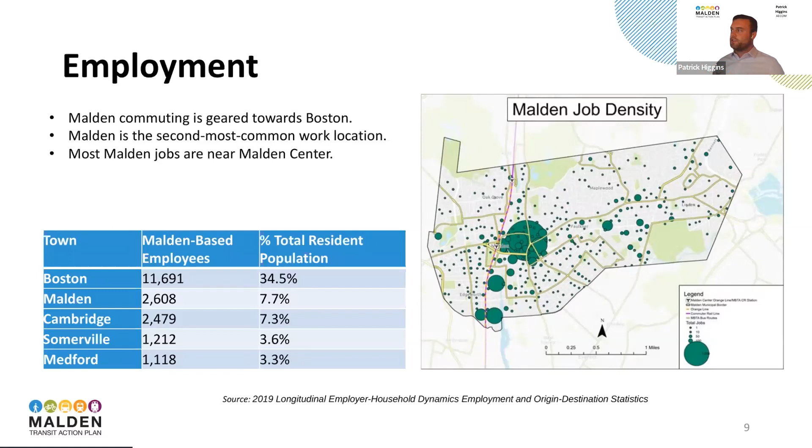Yes, so we do have a public survey open. The link will be shared later on. It's also on the city's website and on SurveyMonkey. Hopefully you've seen postcards and flyers around town and social media blasts about it as well.

To date, as of about 10:30 this morning, we have 961 responses, almost to 1,000, which is really exciting. The survey is available in 7 different languages, and we can also track how many folks in each language are responding.

We have the highest percentages of non-English folks responding to the simplified Chinese survey, as well as the Spanish survey—those are the higher percentages. That does match some of the distribution of languages spoken within the city, but we will continue reaching out to different communities and limited English proficiency communities to make sure we're hearing from as many folks as possible.

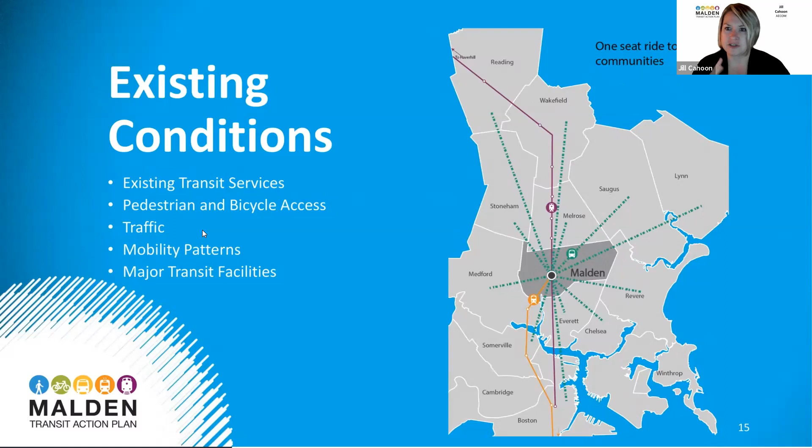With that said, we'll jump right into existing conditions. We don't have a poll right here, but we will have more. What we wanted to do is talk through the different modes of transportation - bus, train, in which case for train we're lumping Orange Line and commuter rail together, and then also lumping together pedestrian and bike access. However, we will talk about those separately as well since pedestrian and bike access is quite different.

And this is for weekdays. Of course, the frequency of the buses is also less frequent on the weekends and Sundays in particular, as folks who live in Malden and use the bus know well, and throughout the MBTA service area as well.

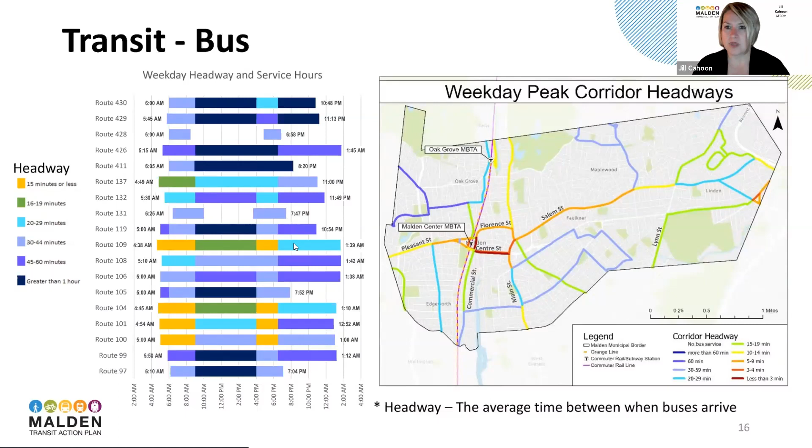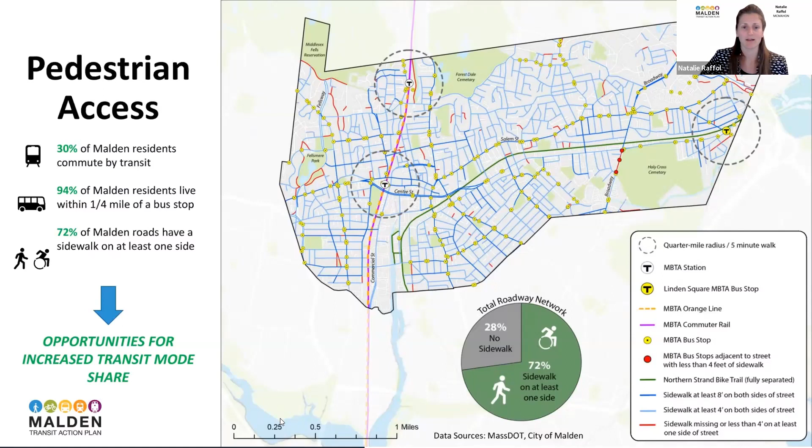We can see the majority of the roadways in Malden have sidewalks, and they have sidewalks that are over 4 feet, shown in blue. The light blue shows sidewalks that are at least 4 feet on both sides, and the darker blue, along Center Street and a portion of Broadway on the top right, have sidewalks even over 8 feet wide. That gives us even more opportunity to consider things like transit amenities that might fit on the sidewalk to help incentivize the use of transit.

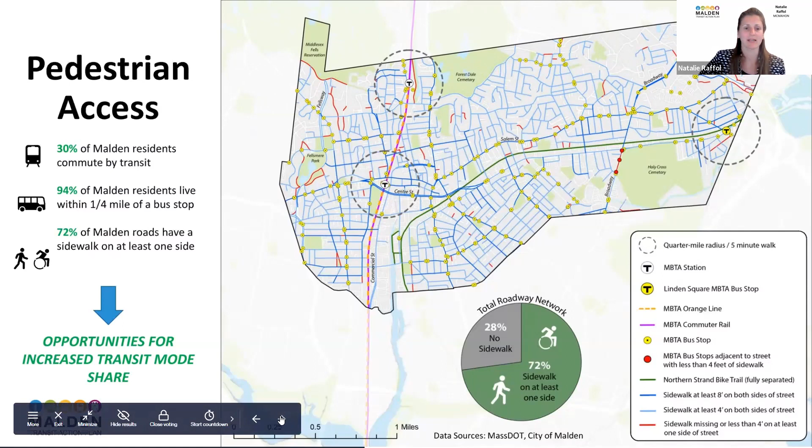If we go to the next slide, we looked at the 3 transit hubs in Malden in more detail in terms of the sidewalks surrounding them. Within a fourth of a mile of Malden Center Station, 93%, almost all of the roads have sidewalks on at least one side of the street, and 69% of those could be considered accessible with a width of at least 4 feet.

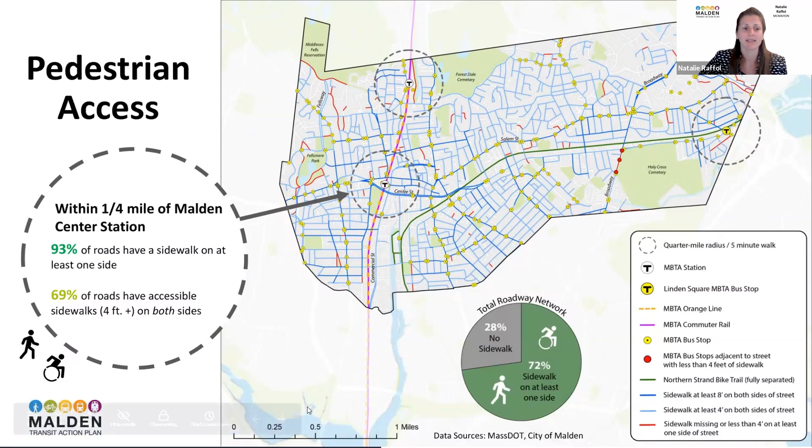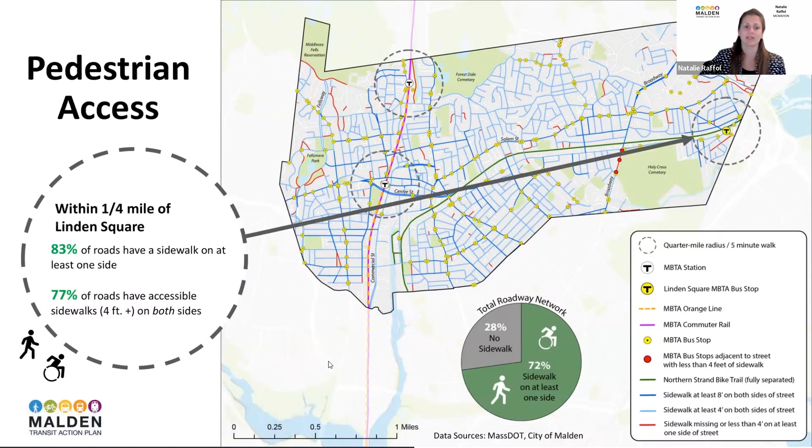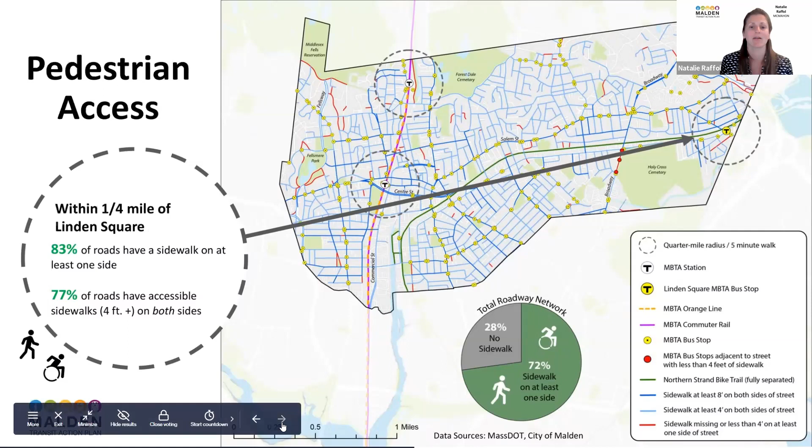Around Oak Grove, slightly lower percentage, but still vast majority of roadways have sidewalk on at least one side, and 64% of those are at least 4 feet wide. Lastly, in Linden Square, 83% of roads have sidewalk on at least one side, 77% of which are accessible. So overall, pedestrian access to transit in Malden is not so much about whether or not a sidewalk exists, but what the condition of the sidewalk is in terms of width and other factors.

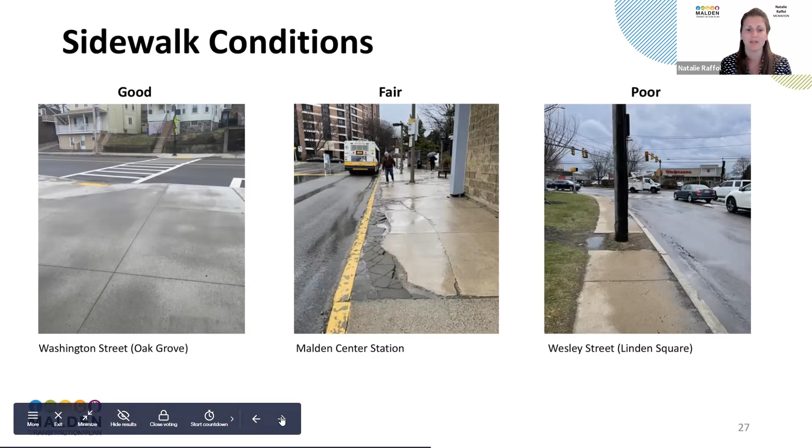Next I'm going to talk about bike access, which was also brought up in the last question about needing bicycle facilities to help facilitate access to transit. As expected, there's less current infrastructure for bikes than for pedestrians in the city. Providing bike lanes is relatively newer, but overall we see there are 10 miles of existing bike facilities in the citywide network, comprising 6% of the roadways.

That's providing direct access to Linden Square bus stops, and also has some connectivity to Malden Center. But overall, there is room to improve connectivity for bicycling throughout the city to different neighborhoods, especially north-south connections, and looking up towards Oak Grove to expand connectivity there.

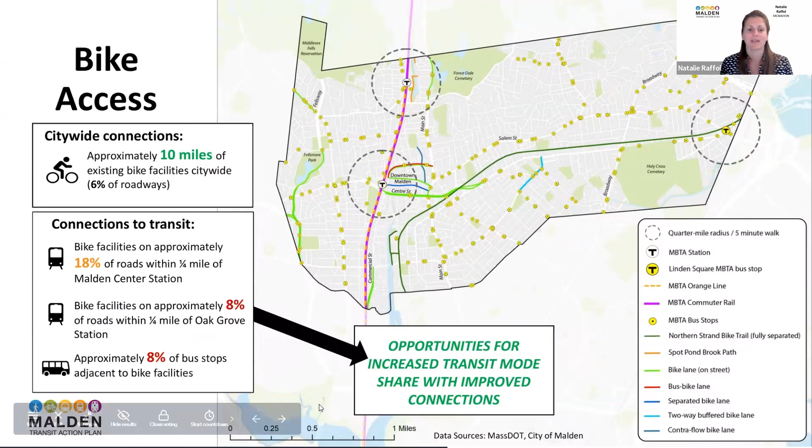So we go to the next slide. This shows a sampling of the different types of facilities in the city. There really is a wide range of on-street facilities. At the top left, we can see sharrow markings, which is where bikes share the road with vehicles.

In the center of the top row, there's the marked on-street bike lane on Center Street, and then the bus bike lane on Florence Street, so buses and bikes are sharing that lane. On the bottom row, on Exchange Street, we see a separated bike lane that has parking as the separation between the bike lane and traffic. Then a two-way buffer bike lane on Willow Street, and a contraflow bike lane on Dartmouth Street, which allows bikes to travel in the opposite direction of general traffic, helping provide a more direct connection for bicyclists.

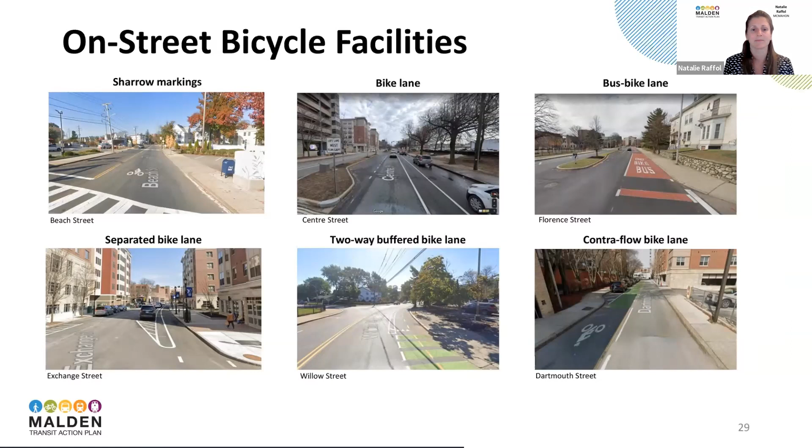If we go to the next slide, you can see there's a variety of facilities. And so we need to think about what people these facilities are catering to, because a facility might provide a connection, but it might not provide a connection for all types of people.

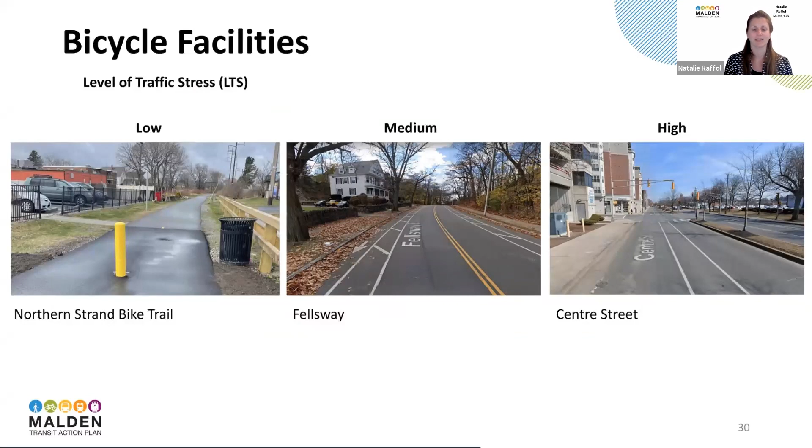So in order to try to evaluate that, we look at a metric called the level of traffic stress. That evaluates different types of bicycle facilities based on how close they are to vehicular traffic, whether there's separation, whether there is on-street parking on a roadway, or the traffic speed. Essentially, how much conflict or stress a bicyclist might be experiencing.

If you go to the next slide, you see here depictions of different types of people or users that might be expected on these facilities. A low stress facility would be the Northern Strand Bike Trail, which is completely separated from traffic, so a low conflict area, suitable for all ages and abilities. Something like that would be thought to provide the most access to transit, because you're providing a facility for the most amount of users.

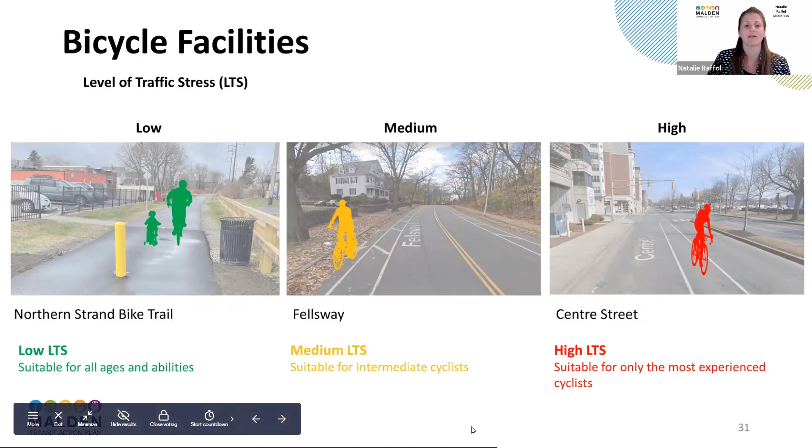Then a medium level of stress would be something like a buffered bike lane, where there is some distance from the adjacent traffic, but you're still riding on street—that's more for intermediate cyclists. Then a high level of traffic stress would be a bike lane on the road without any buffer or separation, and only the most experienced cyclists might feel comfortable there. So, for example, if that provides a connection to Malden Center, let's say, it's providing a connection for some bikers, but potentially not all bikers, to access that station.

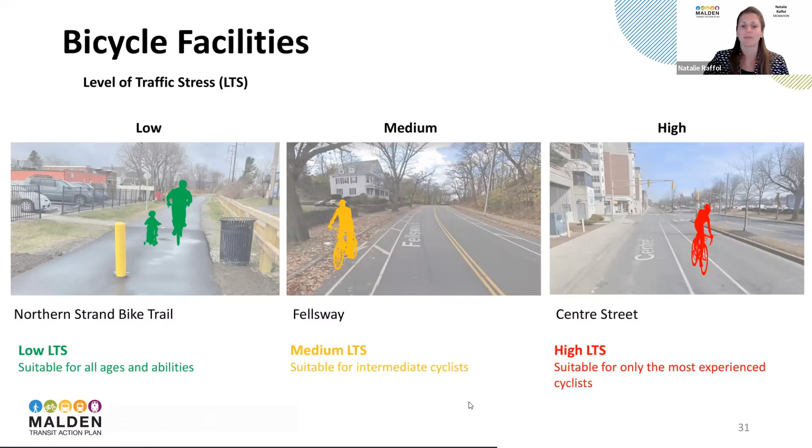So if we go to the next slide, the final topic I'm going to discuss as part of this is bike parking, because part of accessing transit by bike is having the ability to park your bike somewhere. Some people might choose to take a bike on a bus with them, but if not, then there needs to be safe and secure bike parking, especially for people who might be commuting and leaving their bike unattended for long periods of the day. So we did an evaluation of the bike parking available at the three transit hubs in Malden.

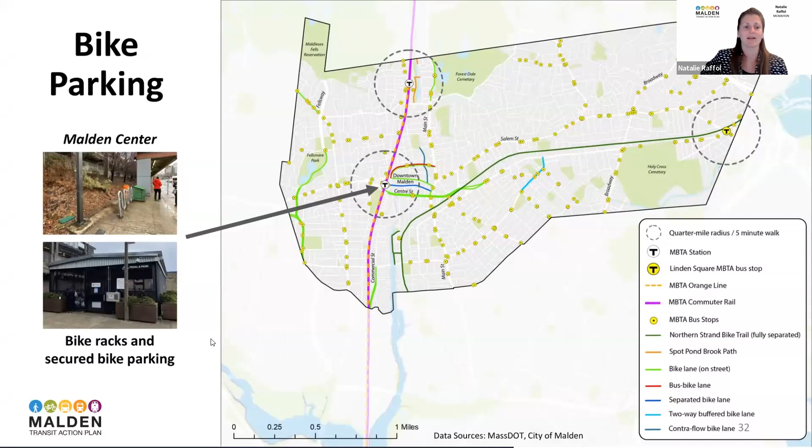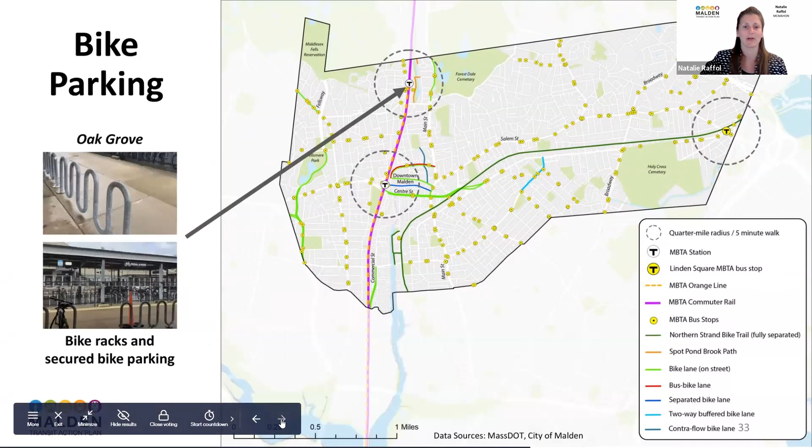At Malden Center, we see a variety of parking where there's the typical bike racks in the front, which are very visible and easy to use, but might not be suitable for people leaving their bikes for the whole day, who might want something more secure. So at the back of the station, there are the pedal and park bike racks, which provide that security. Similarly at Oak Grove, there's the more typical visible bike racks, as well as the secure pedal park facility. And last, at Linden Square, there's actually only a small bike rack on the sidewalk.

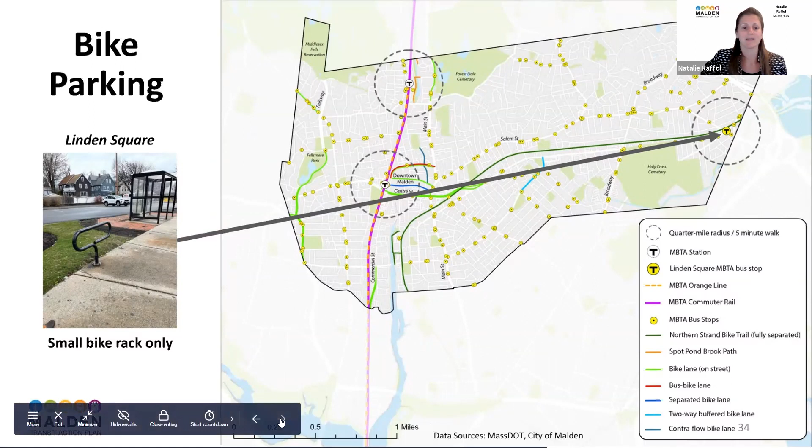So that's an area to think about, potential to expand bike parking to help incentivize using the bus service there, as the Northern Strand Trail is running right by the bus stops. So having more bike parking might help people use the bus more easily. That's the information I'll conclude this section with, and then I think we'll go to another polling question.

Excellent, thank you for that, Natalie. As you can see, there's a lot of things to consider when it comes to bikes and pedestrians, and where the facilities are and the classifications, as Natalie went through. So it'd be interesting for the community to reflect upon what's working and where you might need some improvement throughout the city as well. Again, a reminder to join online, the website is at the top of the screen here, www.menti.com, and remember to use the code as well.

So our next question here is, where do you experience the biggest barrier to accessing transit? Where are the biggest barriers for you to be able to access really the accessibility of getting into the transit facilities?

And what's interesting about this is the one where you can place some dots on the map here. So as you're seeing some of these dots show up, if you can zoom in a little bit and try to get as close as you can, it'd be great to understand where some of these accessibility issues are for transit. This would be really helpful for the team in understanding where some of those barriers are, and maybe they turn those into some actions that we can improve accessibility around these different stations, whether it be about bike, pedestrians, walkability and so forth. This is really kind of helpful.

So let's intentionally let this sit for another 20 to 30 seconds here to fill this up. And if you don't have the chance to put your dot on the screen, it'd be great to talk about that during the Q&A, because understanding where some of the highest issues are, and really where some of the successes could be coming out of this plan, would really be helpful in terms of giving us some really clear action. So this is super helpful as well.

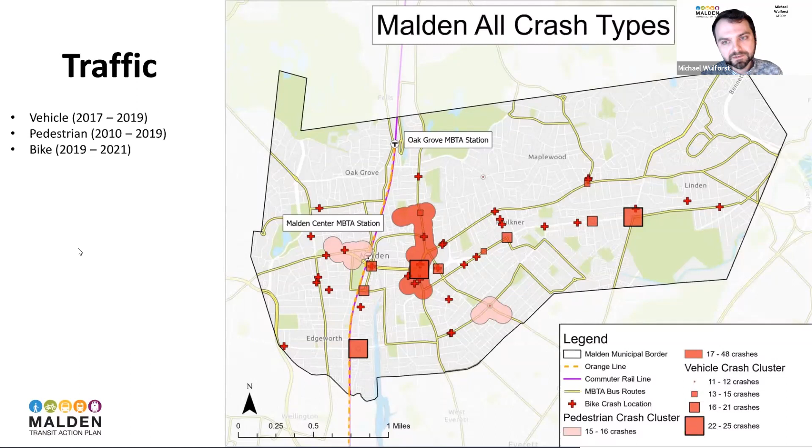So in addition to safety, we also want to look at the traffic volumes using the roads. Currently, a large portion of the roadways are dedicated to serving vehicular traffic, and so naturally we want to understand where those vehicle volumes are greatest.

So going forward, when we're thinking about how to potentially better serve bus routes and bus priority, this data will be really informative to help us craft bus priority opportunities to bring to you all for further consideration.

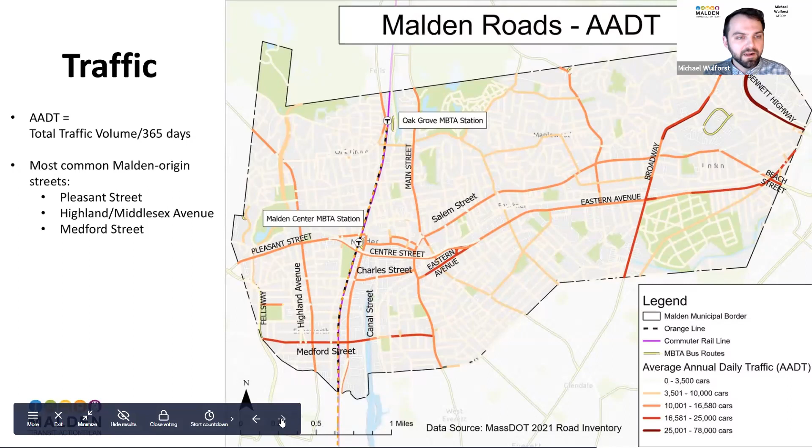And so with that, and looking at this traffic volume, I'd like to hand it over to Patrick to talk a little bit about travel trends in the area.

Thanks, Mike. So I think the AADT slide we just saw is a nice transition into this. We understand the corridors where this traffic is taking place, and using software that collects data from phones throughout the world, we're able to pinpoint specific mobility patterns within Malden.

When we think about those thousands of trips taking place, and look at the types of trips people in Malden are taking, it's pretty consistent in terms of trips that start in Malden and go elsewhere, and trips that end in Malden from somewhere else. The primary form of trips we're seeing occur within Malden are trips to one's home.

So what you see on the screen here for both the origins and destinations of Malden, the home trips are anytime an individual, in the case of origins, starts a trip from their home, that's an example. And anytime an individual ends a trip at their home, that's another example. We're seeing those are the largest trips, which presumably would make sense given that individuals obviously spend a lot of time where they live.

If we think about other big trip generators, work trips are definitely a large trip generator. Interestingly, in 2022, we're seeing that of individuals who start their trip in Malden, the second most common trip type is a shopping trip. Shopping can be a variety of things, whether it's going to the store to buy flowers or groceries or what have you. But that's an emerging trend we're seeing elsewhere too - this increase in more recreational style trips.

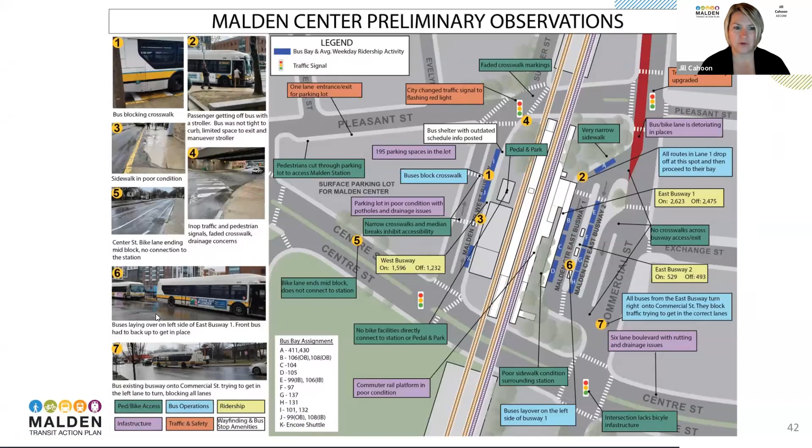I think around three of the priority areas that we've started to look at as well. Exactly, yes, thank you, Jeffrey. So we'll look at Malden Center, Oak Grove, and Linden Square again. We haven't forgotten about the rest of the city, but this is where a lot of the activity is happening, so this is where we're concentrating some of our preliminary efforts.

So the next three slides are very, very detailed maps, and I know you probably won't be able to take it all in because there's so much going on in them. But what we wanted to do was zoom in on those three areas again, Malden Center, Oak Grove, and Linden Square, and look at the different modes, concerns, and opportunities we're seeing. The notations in green have to do with concerns about bike or pedestrian access. The blue have to do with bus operational concerns. The yellow notes high ridership stop locations, so we need to be aware of that. The purple is the infrastructure concerns we've seen, which Natalie also mentioned a bit in her conversation.

The orange would be traffic and safety that Mike and Patrick talked about, and the white are wayfinding and bus stop amenity concerns. We did see that the group here tonight noted amenities as a concern as well in one of our earlier polling questions.

So you can see here at Malden Center that we are looking at a lot going on. There's a lot of bus routes that come into this area, there's obviously commuter rail as well as the Orange Line, bicycle infrastructure with the pedal and park, and bus lanes. The bus lane ends out front on Commercial Street. There are a variety of conditions of sidewalks and crosswalks in this area.

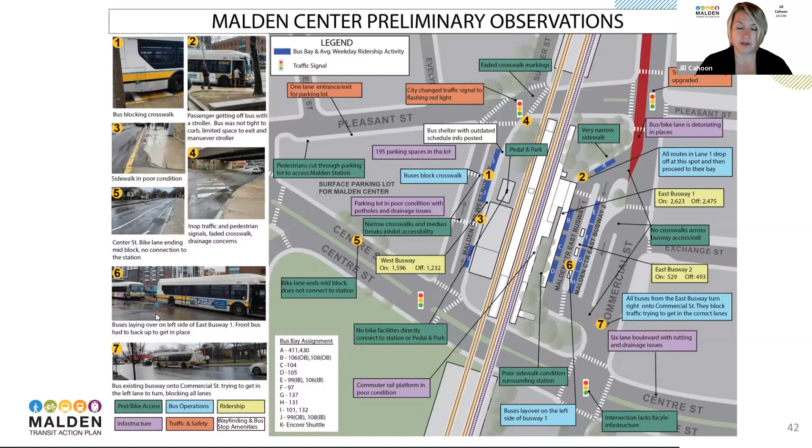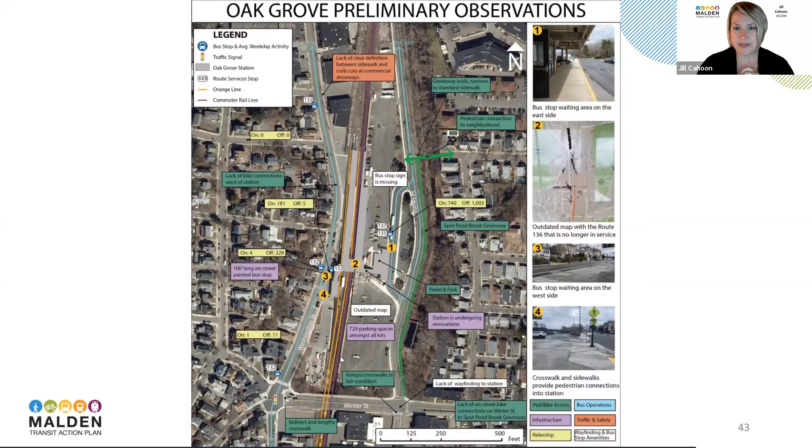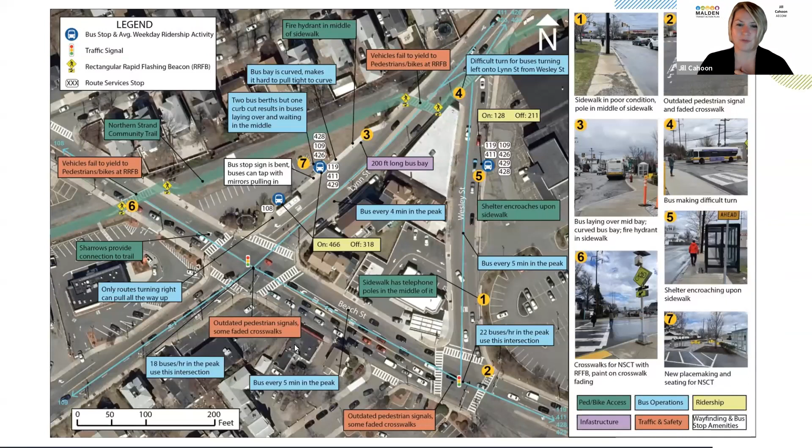And so we're almost to the point where we're opening up the mics — but back to you, Jeffrey.